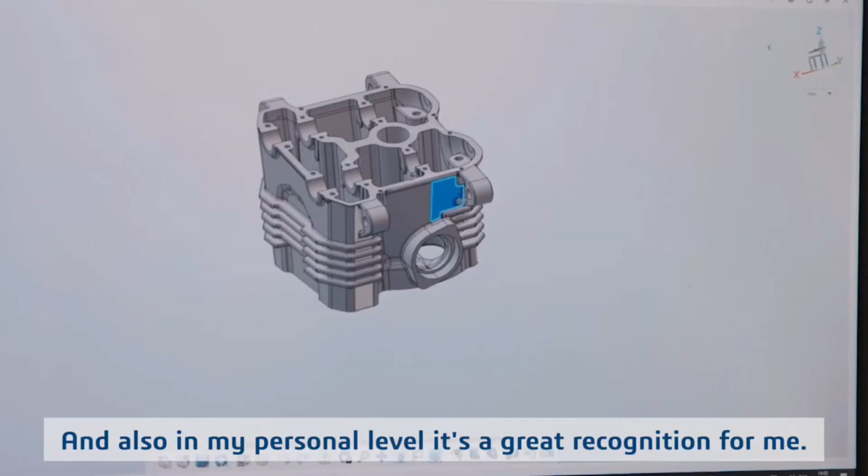The reason why I encourage every student to get certified is the opportunity that you get through certification. For instance, for me, I got involved in the international community, and also I got the opportunity to get outside my country, experience new stuff, working to implement all of the knowledge that I got through working on certification to make it into real life. And also on my personal level, it's kind of like a great recognition for me.

The certification, like CSWA specifically, it's really a familiarization with the software. It's understanding where to find the tools, how to troubleshoot, how to understand how you move within the software. So fairly easy to get trained up on that. The CSWP is more of a speed test, right? You have the same amount of time, but 50% more information.

I'm seeing more and more students coming into my class who already have certification, so we also offer the professional level exams for those students. The first time taking the test, I felt a little bit scared, but when I got it, it's kind of one opportunity for me. Taking the test, I was a little bit nervous to begin with, to be honest, because it was a pretty big deal. But once I got through it and saw my score, I was super excited and happy.

So the certification is one of the ways that I like to have an assessment for myself, whether I'm doing well or not. So when they see my LinkedIn profile, I got a certification, they didn't hesitate to reach out to me: man, we need your service for this stuff. So it's kind of an opportunity for me to do that. I would wholly recommend to get your certification in SolidWorks if you have the opportunity to. It would only help you in the future.

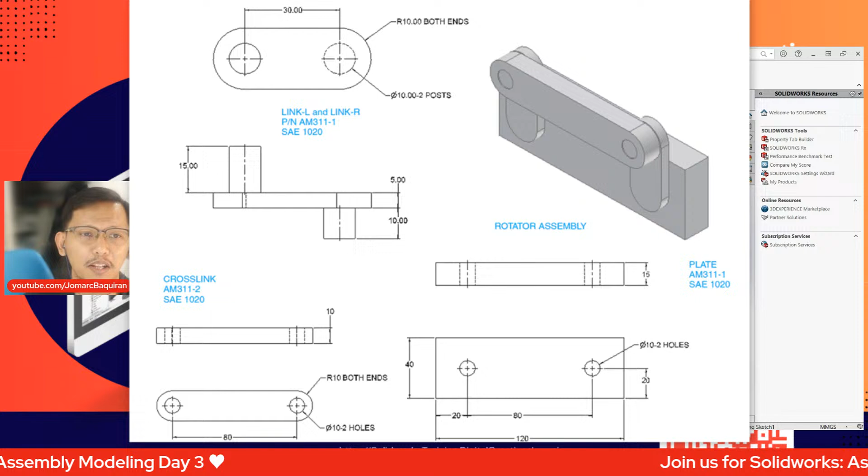So notice with this assembly, we have 4 parts. A very simple assembly, right? 4 parts, 4 components. Okay, again, requesting everyone to screen capture.

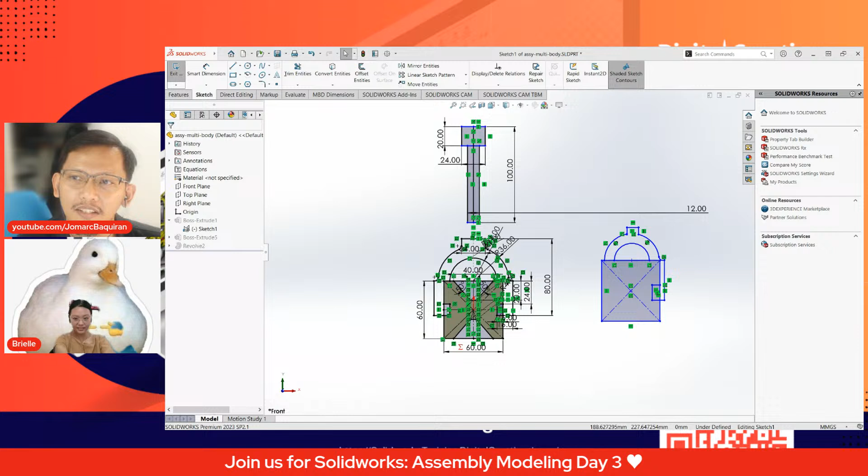And of course, again, joining together with me is Brielle. So I am currently trying to do my best to teach her SolidWorks as well, and ultimately to inspire this young lady to be in the STEM profession. Thank you for joining us, Brielle.

Okay, so again, we have 4 parts. Let's hit Control N. So, again, an assembly consists of parts. And parts, of course, consist of sketches, right? That's why we're iterating the importance of how to quickly draw, how to quickly create a sketch, and how to understand relations and how they are used in conjunction with parametric modeling. Okay, so we have 4 parts.

Let me ask our guest student, what do you prefer, Brielle? What do we create first? Okay. So again, going back to our challenge, notice here all the parts. If I'm going to ask you, who is the parent part here, right? So the parent part, where all the parts attach, is definitely the plate, right? So because of that, we will first be creating the plate component.

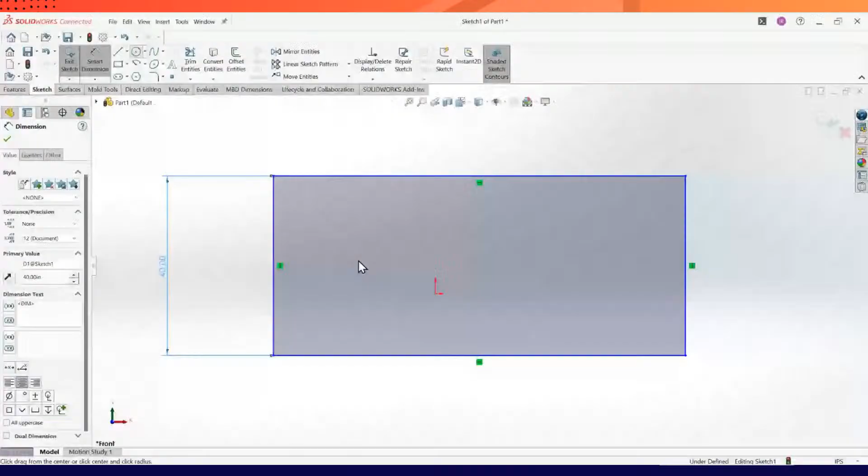So for me, again, we prefer that whatever we see on the isometric view should be the same position as well when we hit isometric view in SolidWorks. So if you're going to sketch the plate, definitely we'll be sketching on the front plane. And of course, notice the geometric center of this rectangle. So again, requesting everyone to make sure that the origin coincides with our geometric center.

So for Brielle, I would be suggesting she should have started with creating a center rectangle. Once more, requesting everyone to follow along. We're currently creating the first part. So for Brielle, currently she placed the origin at the lower left; I'm suggesting this origin should be at the geometric center, or at the center of our rectangle.

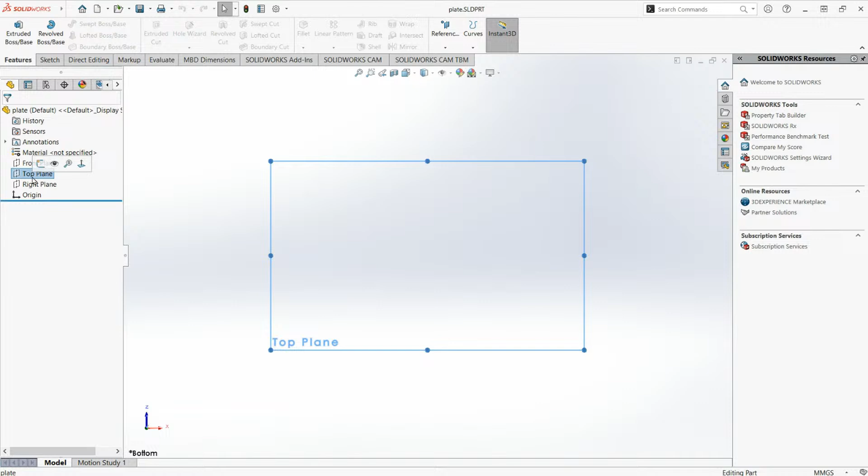So sharing my screen again. Let's sketch on the front plane. Selecting sketch. So again, there's a center rectangle command. Left click on our origin, grabbing smart dimension. Dimension for this to be 40. Selecting these two vertical lines, keying in 120.

Let's bring out the two circles. I prefer sketching them here. Creating a line from this center point to this center point. Making this line perfectly horizontal, again adding a horizontal relation. Turning this line into construction geometry. Selecting these two circles, making sure they're equal in diameter, so adding the equal relation. Grabbing our smart dimension. The diameter for these two holes is 10.

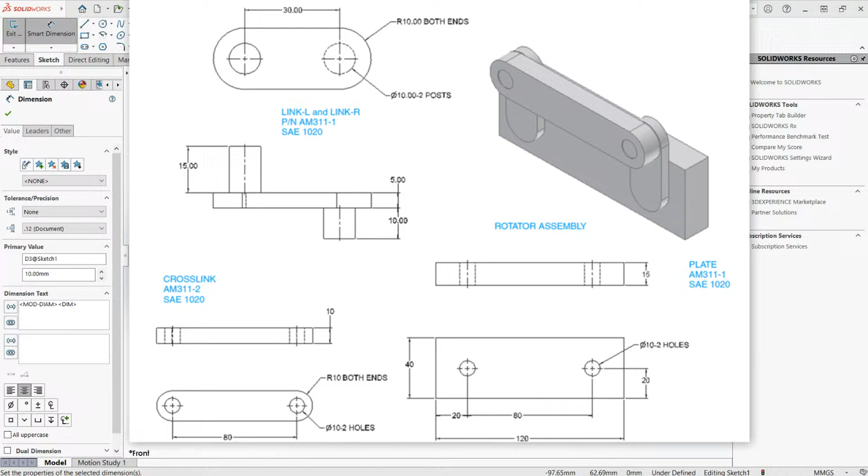So once more, showing you the activity. Yep, highly agree with Ivan. Thank you, Sir Ivan Vicencio, for joining us. Again, requesting everyone to follow along. So let's check Brielle's work. Sharing her screen.

I suggest Brielle try to move those blue circles. Hit escape. Okay. So from that movement, I am seeing she needs to add a horizontal relation. So I suggest for you, Brielle, select the center point of those two circles and then selecting the center point of... okay, it's now fully defined. So Brielle may now extrude this. Let me catch up, sharing my screen.

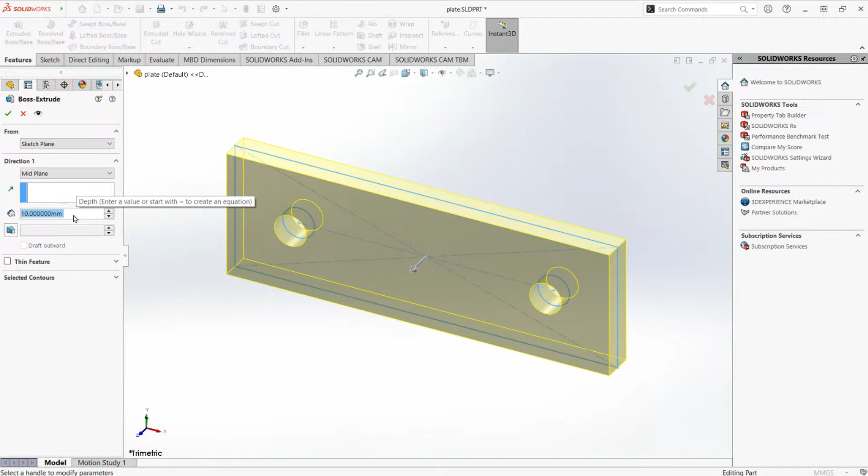So the center to center distance is 80. And for me, I'm going to select this construction line and our origin and add the midpoint relation. So we have a difference in approach, me and Brielle. Exiting out of the sketch, selecting extruded boss base, again making things at the center. For direction, I'm going to change this to mid plane and the thickness to be 10. So we're now done with our first part.

Again, sharing the challenge. Brielle, what do you prefer we do next? The link or the cross link? Okay, so she mentioned cross link. So let's go back. Control N, creating another part. Double left click this icon. Hitting Control S to save this right away and naming this cross link.

So again, showing you the drawing. It has a center to center distance of 80, diameter of those holes to be 10, thickness of the cross link to be 10, radius of that arc is also 10. So for Brielle, again, you should create a new part, Control N. Delete sketch 2. Suggesting you go back as well to that previous part and delete that sketch. Okay. It's now okay.

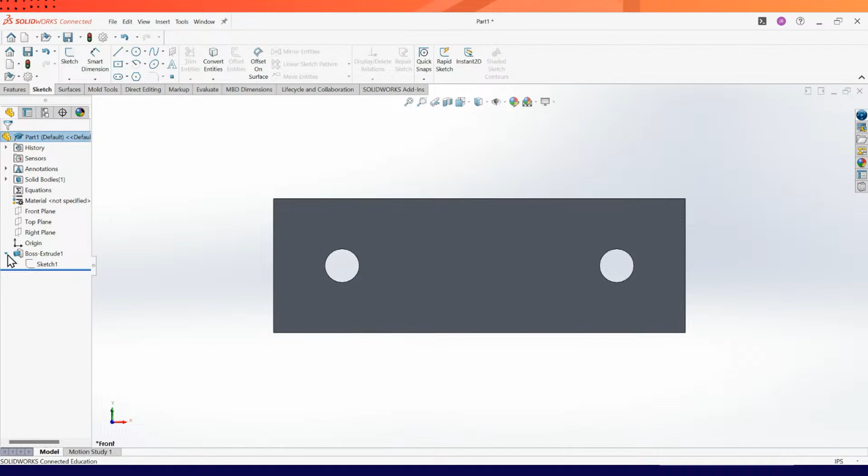So sharing my screen, let's create that cross link, hitting L for line and sketching on the front plane. Let's utilize the line tool, which creates an arc as well. So left click, and going back to that endpoint. Notice it turns into an orange dot. Going back, pulling out, and notice it now becomes an arc. So left click, going back, it's now an arc, and left click on this endpoint.

Let's create the circle once more. When we hold our right mouse button, notice we have the circle command tool. So notice if I move to the right, we're activating the circle command. So creating circles here, hitting S and selecting smart dimension. This one to be 10.

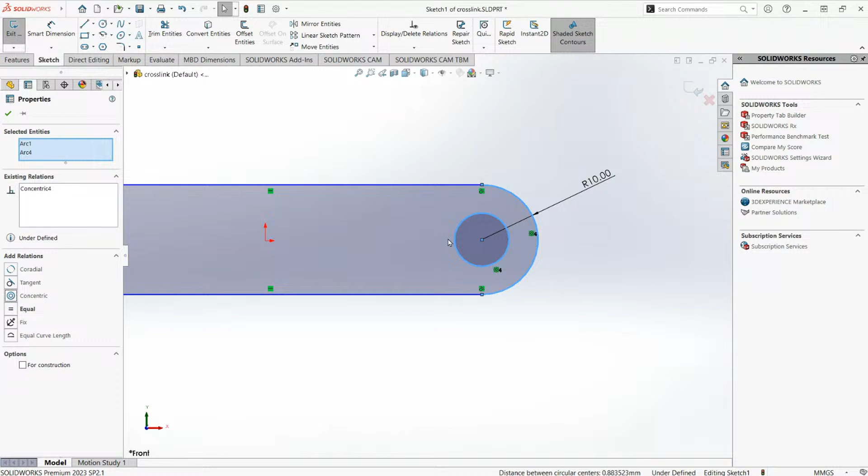And notice as well here, this circle and this arc need to have a concentric relation. These two, this arc and circle as well, selecting concentric. Hitting S for smart dimension, selecting the center point and the center point. Keying in 80. And resizing this circle. Notice by resizing this, it's obvious that this circle and this circle need to have an equal relation.

So next, let's align my design intent. Instead of creating a horizontal line, let me align the midpoint. When I hover over here, there's an indication: this orange dot indicates that this is a midpoint. So selecting this midpoint, holding control, selecting our origin, aligning this midpoint and our origin vertically. Same with our center point and our origin, aligning them both horizontally. So notice again, this time I forgot.

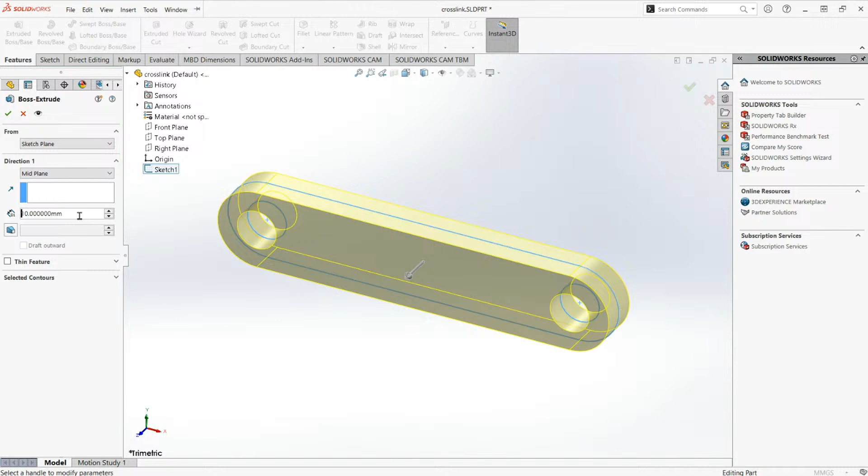Exiting out of our sketch. Selecting extruded boss base. Twirling this down, selecting sketch. And for direction, selecting mid-plane. And again, the thickness for our crosslink to be 10. So making sure it's 10 and hitting enter.

So next, our next target part would be the link. Notice the link L and link R have a cylindrical protrusion which has a distance of 15 and 10. So same procedure as our crosslink; the difference is it has a protrusion. So let's see Brielle's screen.

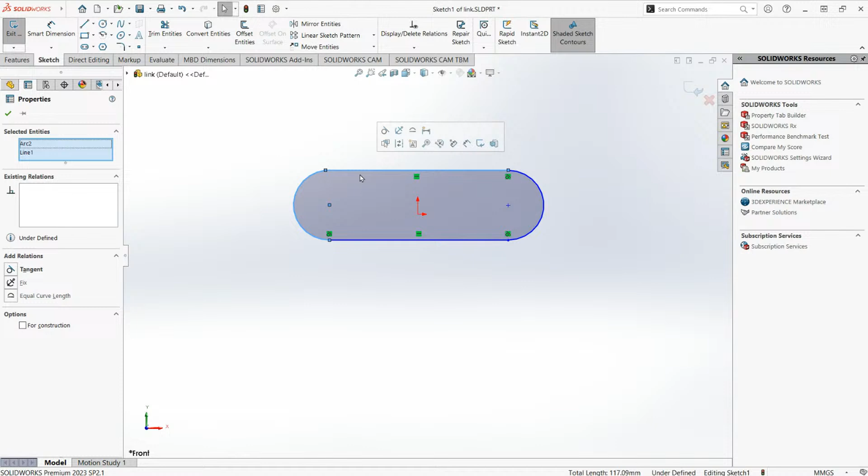So it's my turn. So again, for my sketch, this is my screen. So this one, notice, obviously this needs a tangent relation. Same with this arc and line, tangent relation. Let's now add dimensions, selecting smart dimension, radius for this, 10 as well.

Let's create 2 circles. So I prefer creating all of the sketch. It's also possible that you initially just create the slot, extrude, and then create another sketch for these 2 circles. Diameter for this circle is 10.

So making these 2 circles have an equal diameter, selecting equal relation. Again, aligning this midpoint and our origin vertically, the center point and our origin horizontally. Hitting S, selecting smart dimension, selecting these 2 centers, center point, value to be 30. And exiting out. Oh, now it's all black, which means this is fully defined.

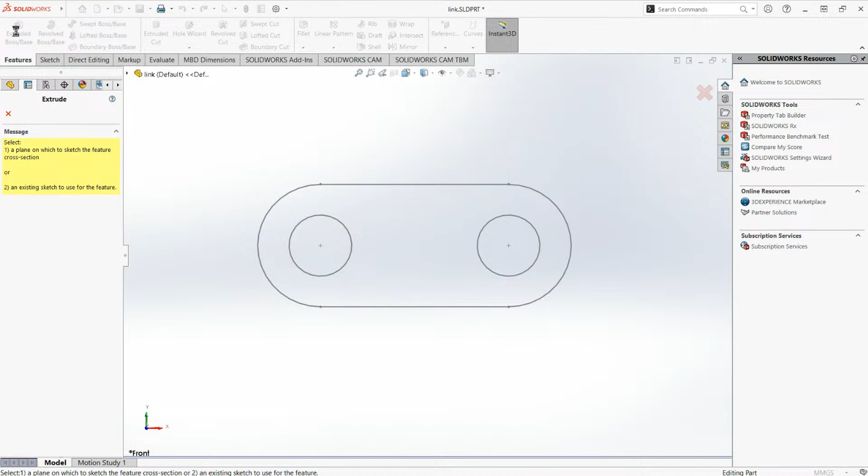Let's exit out of this sketch, selecting extruded boss base, selecting the sketch, which is sketch 1, and selecting this drop down. Notice contours is currently sketch 1. I'm going to add this contour. There's 3 contours. Deleting sketch 1. And again, for direction, making sure things are at the middle or center. Selecting mid plane. Thickness to be 5.

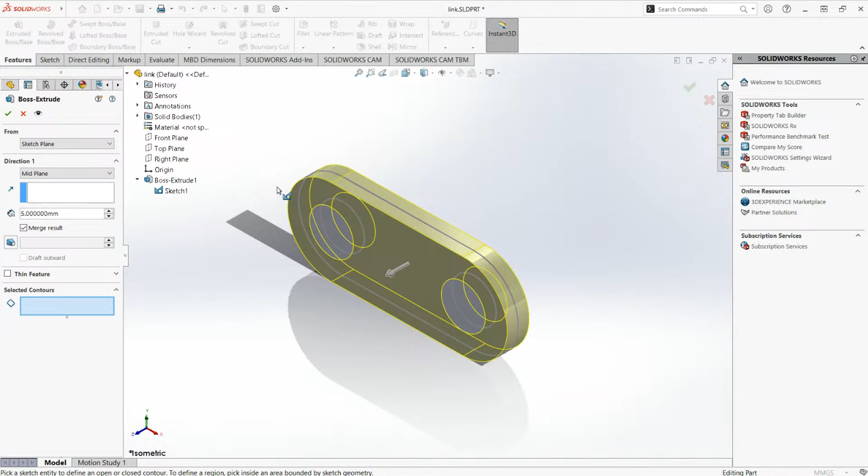Okay. And next, we're going to reuse that previous sketch which was consumed by the boss extrude 1. So I can make that sketch visible, selecting extruded boss base, twirling this down, selecting sketch. So for the contour, selecting this drop down, going to clear the selection. So selecting that region, pulling this out.

So for the direction, changing this to blind, pulling this to the other direction, and let's check our drawing. So again, we're extruding from the center or from the front plane. So we have to compensate. Going to type in 2.5, half of the thickness, plus 15.

Hitting enter. So I have just showed you that we can, of course, do MDAS, mathematical operations, inside that dialog box, and selecting the green check mark. Making sure, of course, this is boss extrude, not cut extrusion. Okay, Brielle is already done. Sharing Brielle's screen.

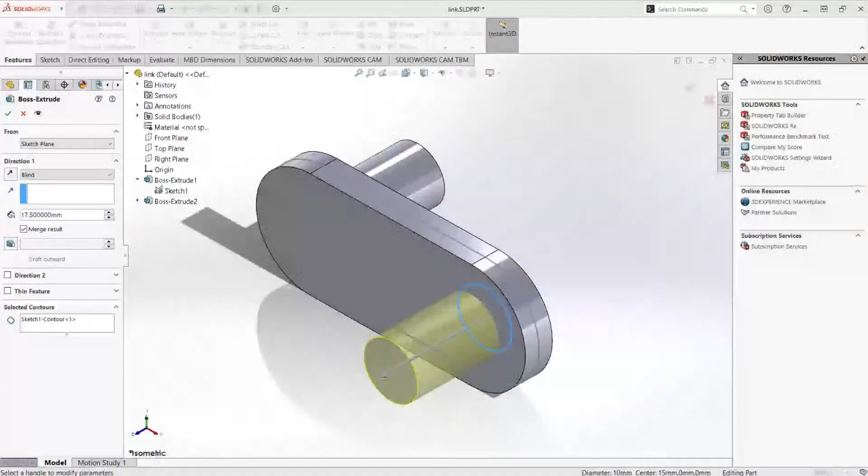So sharing my screen, again coming from this mid plane, this plane. So again compensating 2.5 plus 10, or in other words 12.5. Making sure merge result is enabled. Control 7 for isometric view, and we can now turn off the visibility of the sketch. So selecting hide.

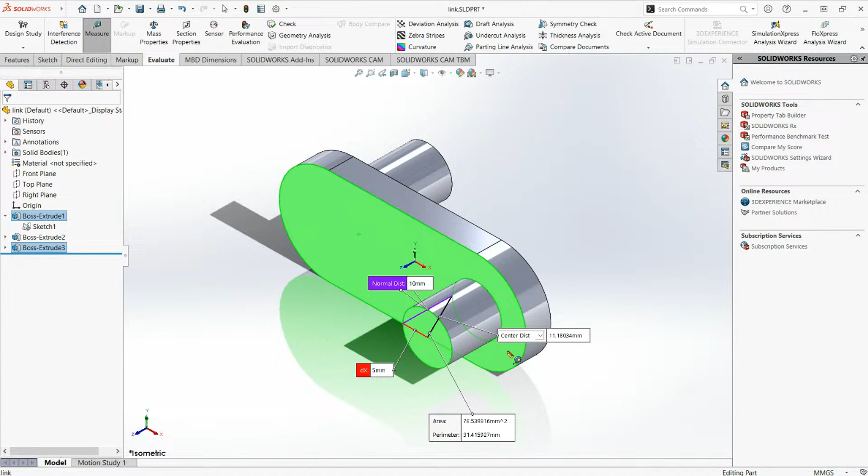So to check as well, you may head over to our ribbon, specifically the Evaluate tab, selecting Measure, selecting this face and this cylinder's face. So again, confirm this has a 10. The distance for the cylinder, or the height, is 10 millimeters.

So we now have all of the parts complete. I want you to hit Alt. So when we hit Alt, on the upper left, we have a window suggesting we tile this horizontally or vertically. So these are currently the parts that are opened. Got it?

So next, let's now merge these parts or create an assembly. So Brielle, everyone, I want you to hit Control N. This time selecting assembly. And again, I'm going to hit Alt on my keyboard to conjure the window, selecting tile horizontally.

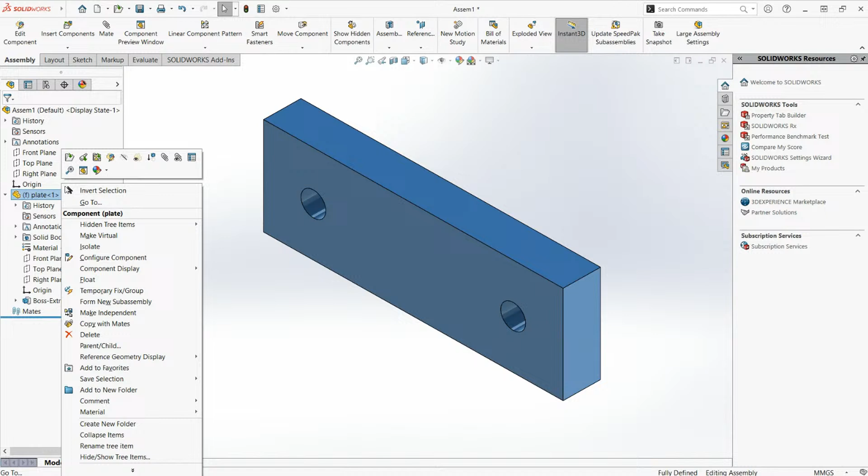So for my assembly, notice when I select origin, the origin of our assembly and the origin of our plate are not coincident. So with that, while this is currently fixed, let me share the challenge for everyone to follow along.

Okay, so going back again, notice that our assembly's origin and the origin of my plate are currently not coincident. So selecting both of these origins, next selecting mate, and making sure align axis is selected. So now the XYZ of our assembly and our plate are coinciding with each other. And making this part, of course, fixed.

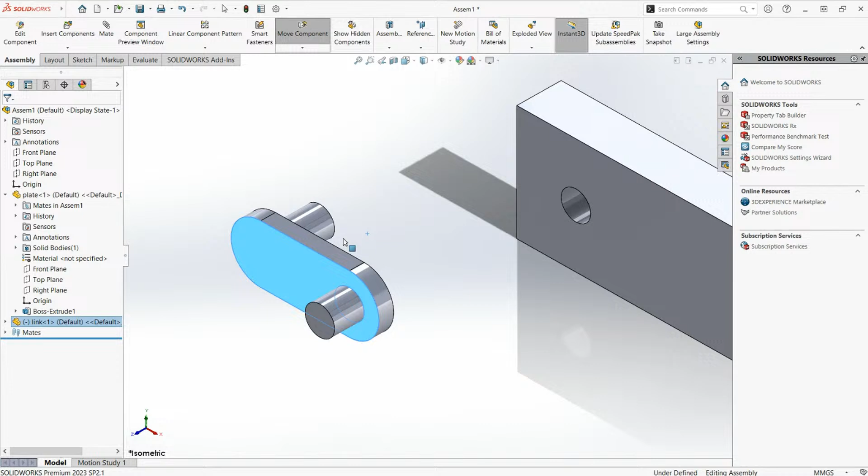Okay, let's help out Brielle, sharing Brielle's screen. So Brielle already placed all of the parts. For Brielle, I suggest let's focus first. Let me share my screen. Let's focus first on this first part. So selecting mate. The intent is to have this cylinder inserted here in this hole, right? So selecting mate.

My next intent is to select this face and this circular edge. So notice I have selected those edges. So again, let me repeat. Notice as well, on your left pane, you can see the mates added. Currently I have the coincident and concentric mates. So again, let me delete. Yes to all. I want you to redo what I did. Same with Brielle, let's wait for Brielle. Again, showing you the drawing.

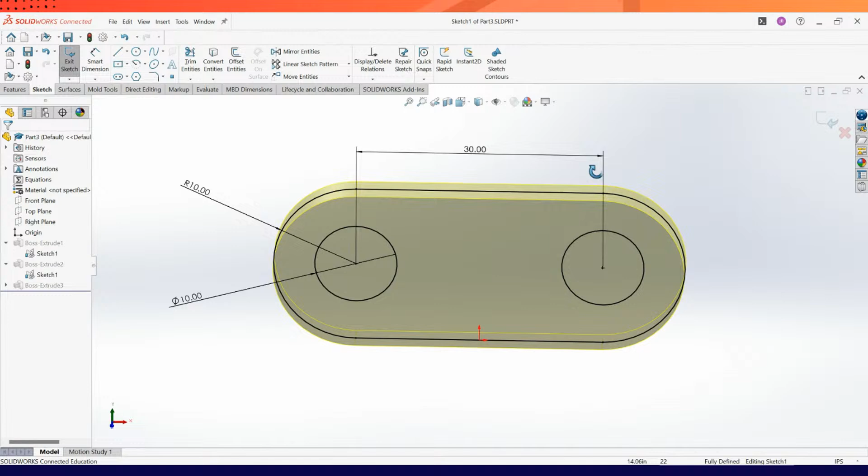Okay, so showing Brielle's work. For Brielle, the distance should be 10 and 15, right? If that happens, we need to do a revision. So Brielle, I want you to head back to that part. It's probably this. Is it Boss Extrude 2? Okay, select Boss Extrude 2, select Edit Feature. Hover over that, right click. Okay, and add 2.5. 2.5 plus 15. Plus, not X. Okay, 15. Notice, when we go back to the assembly, it will update. So hit the green check mark, Brielle.

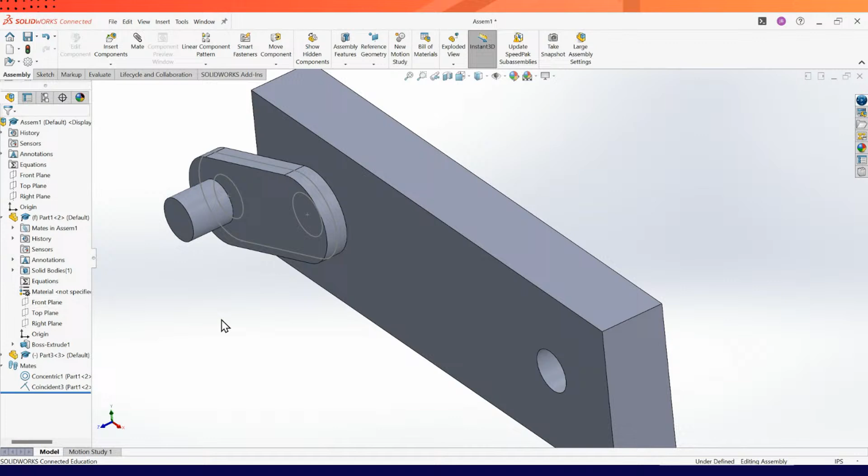Okay, select measure. Select this face and the top of that cylinder. Oh, so it's now 15, right? Okay, I want you to edit Boss Extrude 3. Exit out, select Boss Extrude 3. Okay, and add that 2.5. Yep, and 10. Okay, and go back to your assembly. Control Tab. Escape. Notice, it was having an interference, and now it is updated. So same procedure, Brielle, I want you to place the other link into the other hole. Yep, you may also bring that in.

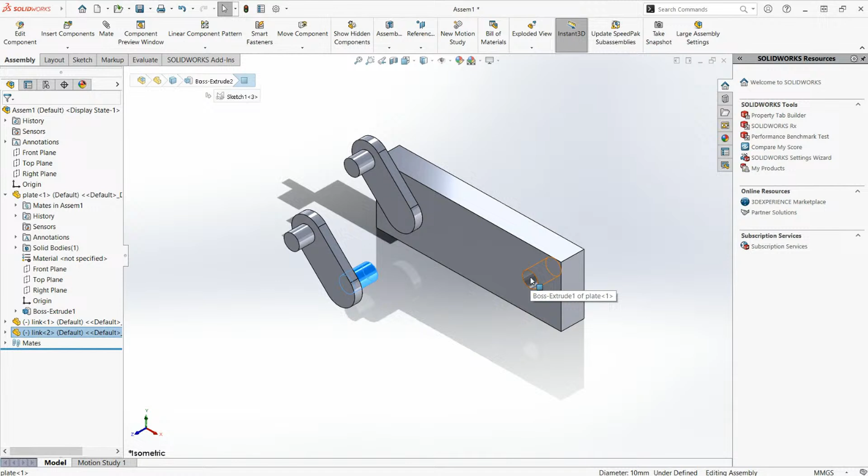So again, showing you the challenge. Let me catch up. Showing you my screen. Another way again, insert component, let's bring in link once more. Or another way to bring in link: I'm going to select link on my browser, hold control and move to our canvas. So I now have that copy of link. That's another method. Repeating the procedure, selecting this face and this cylindrical face, applying concentric. Next, selecting this face and this edge, selecting coincident.

And finally, let me show you the previous method of bringing in components: pressing Alt, selecting Window, tile horizontally, and let's grab cross-link. Notice my cursor is hovering over this icon; left click and hold, and move to where our assembly window is, and release. Let's maximize this window. Let's check Brielle's work. Brielle, same procedure, sharing Brielle's screen.

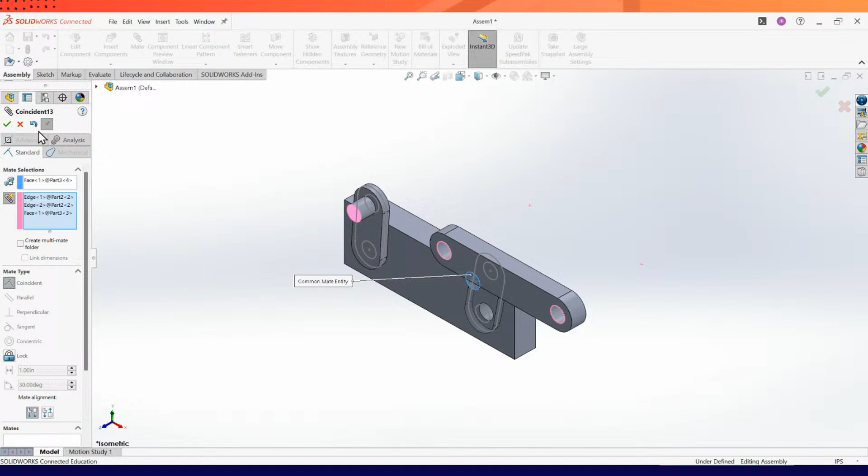Okay, so I have gone ahead and added the cross link again. Selecting mate, I can select this edge and this cylinder's edge and hit the green check mark. So feel free to experiment, and again, practice.

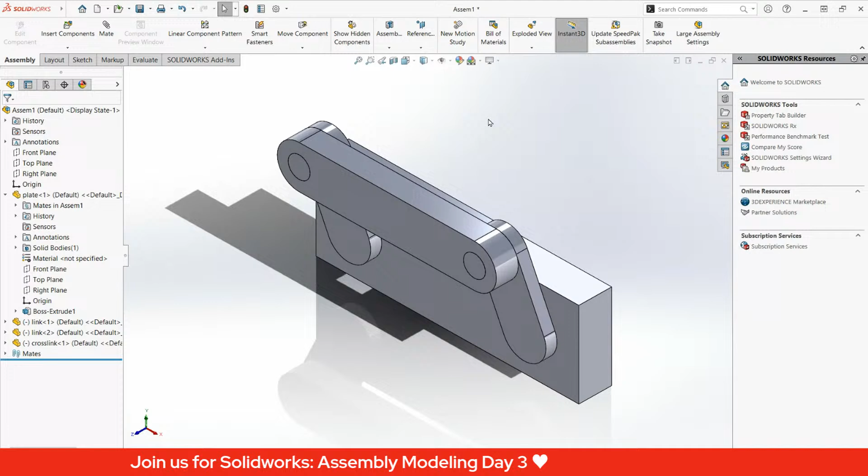Okay, so hoping you have completed the assembly. Just to inform everyone, this is already predefined, right? We already know the dimensions and details of those parts. And of course, there are always instances where we start with the sketch. That's why I gave an assignment for everyone to create this in a single sketch. So let's now discover how to create this, challenging everyone once more to create this in a single sketch.

Okay, Brielle, follow along. Control N. This will be somewhat difficult for Brielle. Let's now hit Control N. Requesting everyone to screen capture. So my turn, Control N, selecting part. Okay, let's sketch on the front plane.

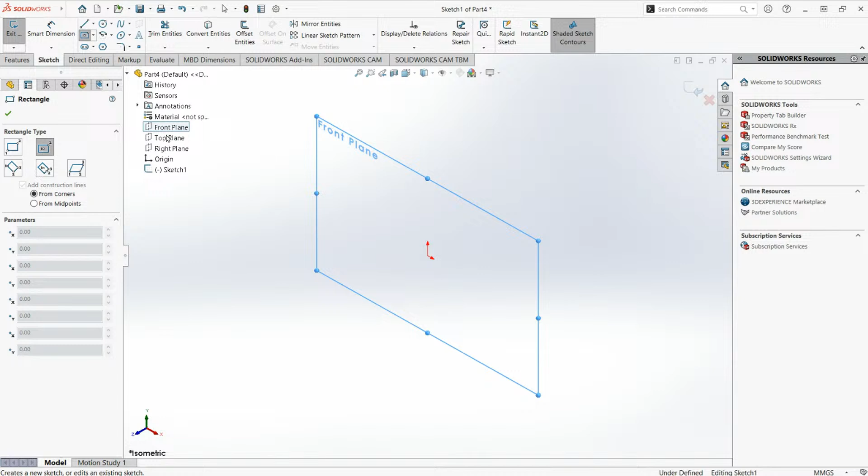So let's start out with a center rectangle, targeting to sketch on the front plane. Control 8 for view normal to.

Let's now add the dimensions, 60. Or I can have these two lines equal in length, but let's follow what the drawing is. So with this highlighted, I'm going to select this dimension, making them both equal to.

And I prefer creating the detail here for this cut extrusion. Let's add the dimension, which is 50. This one to be 50 as well. So resizing to check.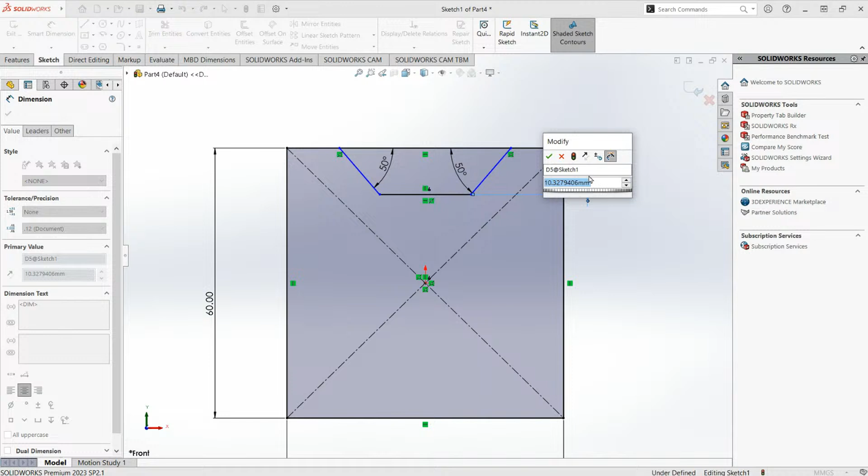Next, let's add the dimension here, which is 20. And the dimension for these 2 points to be 40.

So instead of recreating this below, my next intent is to simply create the cut extrusion on this right side, because what I intend to do later is to mirror them out. So again, that's why make it a habit to always position things at the center or middle, for you to be given the opportunity to save time by mirroring.

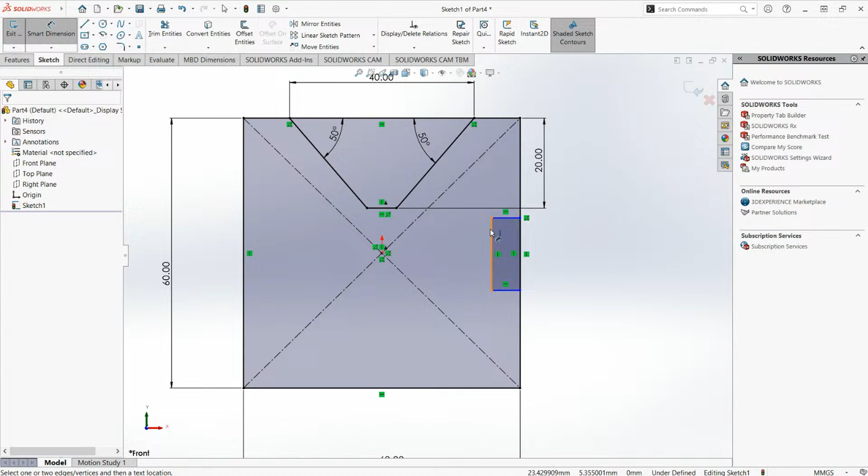So what's the dimension? This to be 6, and this to be 24.

So again, I'm going to be selecting the midpoint of this line and our origin, aligning them horizontally, and now creating a mirror line from this midpoint all the way here, making sure this is a construction geometry. So repeat, line again from this endpoint, from that midpoint to this midpoint, turning this into a construction geometry.

Next, let's select mirror entities up above. Mirror entities. And for entities to mirror, I'm going to be selecting this line, this line, this diagonal line, activating mirror about, and that mirror about will be this horizontal construction geometry line. So hitting enter.

Let's repeat. Mirror entities, selecting this line, this line, this line, activating mirror about, selecting this vertical line, selecting the green check mark.

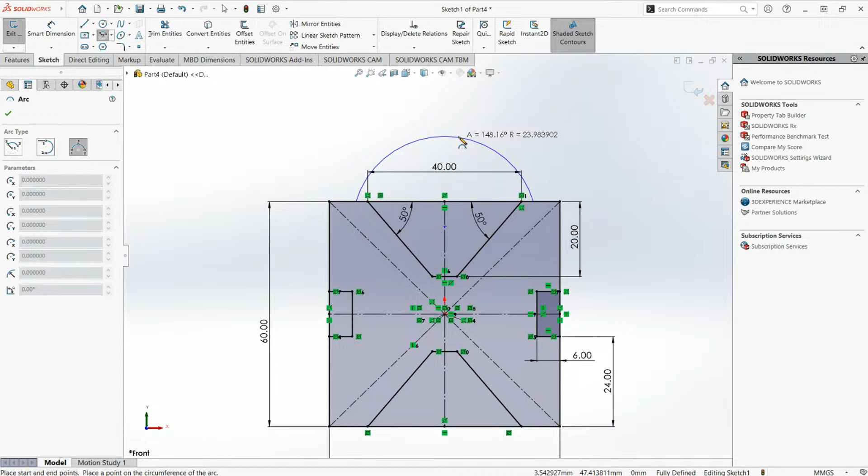So also I notice based on our drawing, the center point of this arc is coincident with the midpoint of this line. But first, let's add a dimension, this to be 24. Selecting this point, the center point of this arc, and this midpoint, let's have them coincident.

Next, I prefer offsetting this arc, so any value will do. And I'm going to delete that created dimension. Same with this relation, again this relation, hitting delete. Let's resize this.

Again, I am resizing the arc I have currently created. Next, I'm going to create a rectangle from this point to this point.

Next, my next intent is to trim this out. Selecting trim entities, holding my left mouse button to paint, zooming in.

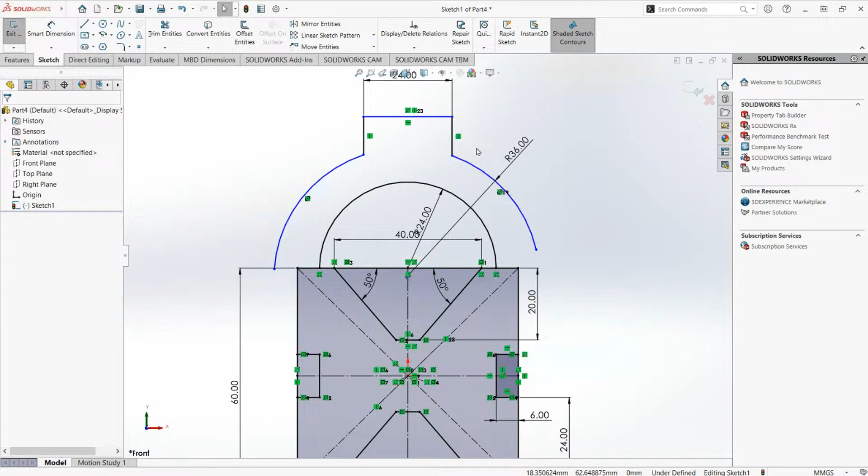So I'm planning again once more to create, to utilize the mirror command. So let me now focus creating an arc on this area, making sure these two arcs are both tangent.

Diameter, or the radius for this, is 4. Next, I'm going to create lines from here, moving up, and of course making this line vertical.

Let's add dimensions. S, selecting Smart Dimensions, selecting this horizontal line and this horizontal line. On the drawing, it says 80. And this vertical line to be 16.

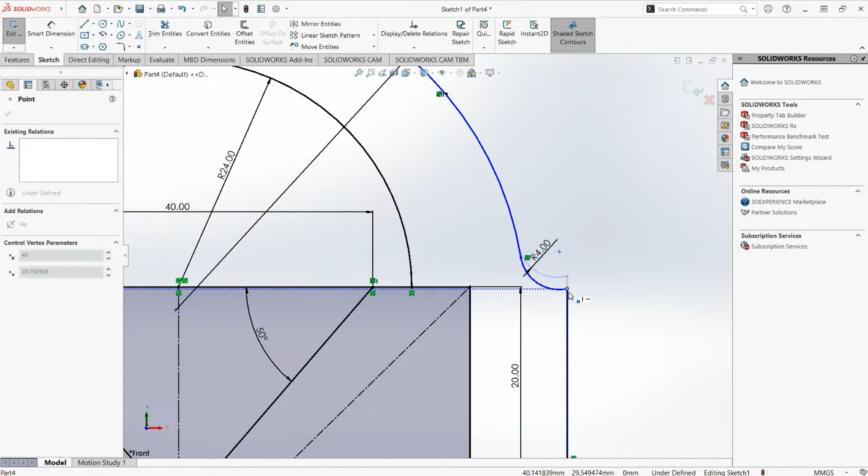So I am kind of seeing, what if I align this point and this point horizontally? Let's check.

I am also seeing that possibly the center point of this arc should also be coincident with the center point, or concentric. So let's check. Selecting these two arcs, making them concentric. So it turned into black, which is correct. We're doing the right thing.

Next, let's add fillets. Although actually, I'm seeing these fillets were later added when this is a 3D model. So, but for this learning purpose, let's add the fillet right away. But definitely next time, fillets are added later as you finish the model. It is later being added, it's not something that is added right away. Of course, it depends on the design intent.

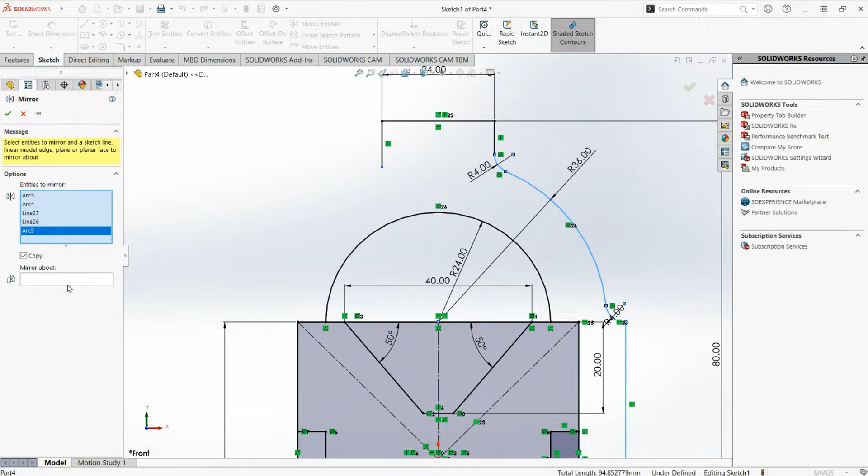Okay, so let me delete this arc. Selecting mirror entities, selecting this arc, this line, and this arc. Activating mirror about, so left clicking here, selecting this vertical line, and hitting the green check mark. So we have a piece protruding.

Let's trim this out by selecting trim entities or hitting S, left click and hold, making sure it's power trim, hitting the green check mark.

For that shaft, instead of creating it right away somewhere here, the request would be creating this above. So creating a rectangle here, another rectangle, making this midpoint, selecting this midpoint and the midpoint of this line.

Let's align them both vertically. Let's grab our smart dimension. This to be 20. This to be 100.

Okay, let's move to Brielle's work. Okay, Brielle, that's 80, right? It's 80. Yeah. You create now the shaft.

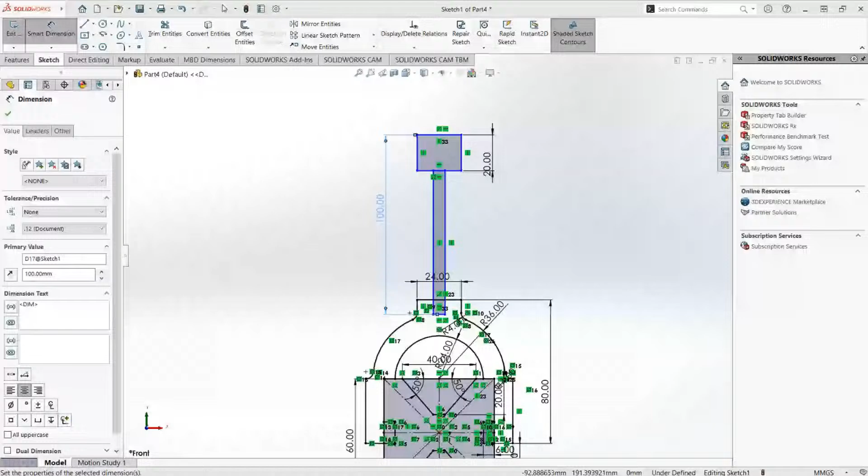Okay, again, sharing my screen. Let me grab this point and move this up. Selecting smart dimension. Diameter to be 24.

The diameter for this to be 12. Next, I want this to be aligned as well vertically, so any of the midpoints of these lines. Selecting, I prefer this midpoint, and our origin, aligning them vertically.

So looks nice. Let's wait for Brielle.

Happy New Year to Sir Carl Joseph Sebastian. Thank you, sir.

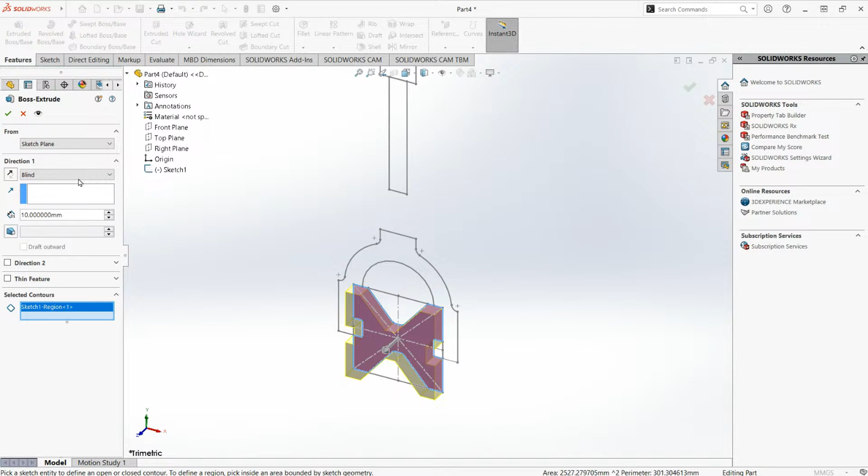So, direction, mid-plane, distance 100. Hitting enter or selecting the green check mark.

Again, sketch consumed, so it is actually still intact, just the visibility is turned off. Okay? And notice we have created one solid body.

So next, I'm going to turn off the visibility of this solid body, selecting hide.

Okay, so let's help out Brielle, sharing Brielle's screen. So for Brielle, I suggest you select any of those horizontal lines. Select a midpoint. And that midpoint, yep, zoom out.

Align it. Select the origin. Zoom out. Yeah, select this origin. Yeah. And align them. Select vertical. So is it aligned already vertically?

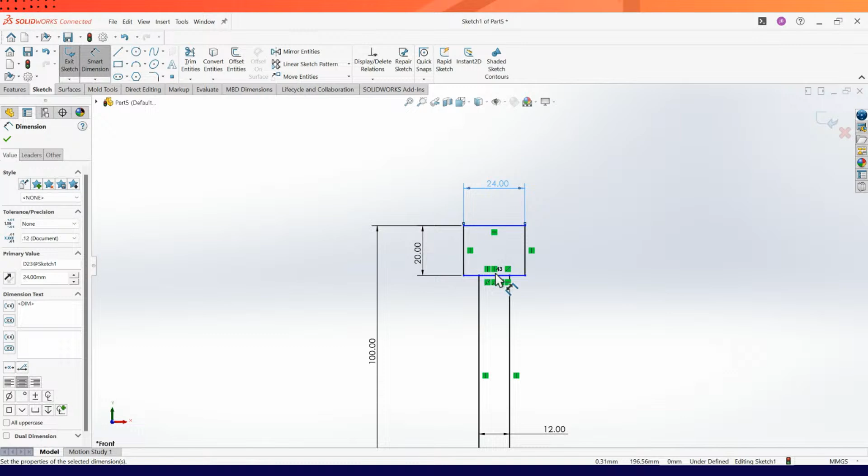So let me go back to sketch and demonstrate to Brielle. Brielle, I have selected this, the midpoint and the origin. Aligning them vertically because my next plan is to create a Boolean operation.

So also please check, Brielle, if the form is complete. So whenever I move, let me share my screen. So notice this is in its full form, right?

Done? So in this instance, it doesn't need to be fully defined.

Okay, so exiting out of the sketch once more. And recall, I have turned off the visibility of our solid body. And let me turn on the visibility or show the visibility of our sketch 1. So going to extruded boss base, twirling this.

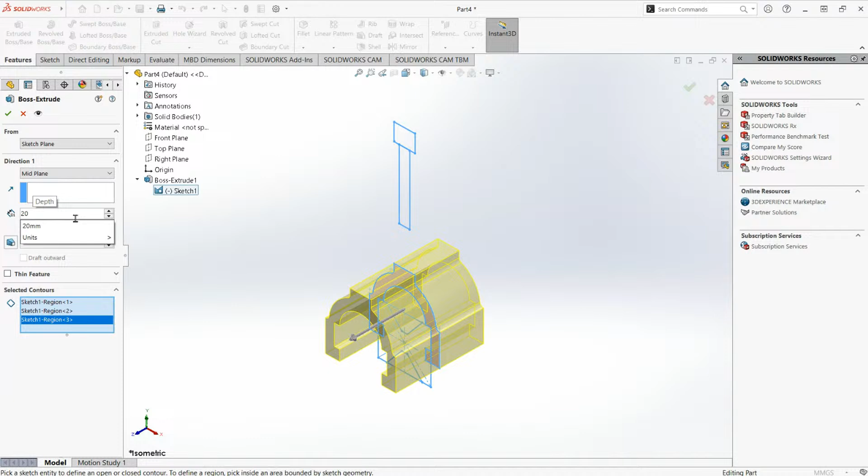Control 7. Again, direction to be mid-plane. Thickness to be 20. So notice we have created the second body, which is boss extrude 2.

We now have 2 bodies. Let me turn on the visibility of boss extrude 1. Okay, and finally, of course, this is not an extrusion.

So let's go back to sketch 1, edit sketch, and for the revolve command, definitely it requires an axis. So let's create a line that will serve as the axis. So exiting out of our sketch, selecting, let's look for revolve.

So again, when we hit S, it's sort of search, right? So S, R-E-V. So we can search commands. So selecting revolve boss base.

I really do prefer selecting the sketch itself. So for the axis of revolution, selecting this line. And for the contours, I activated contours. Notice it's currently highlighted in blue.

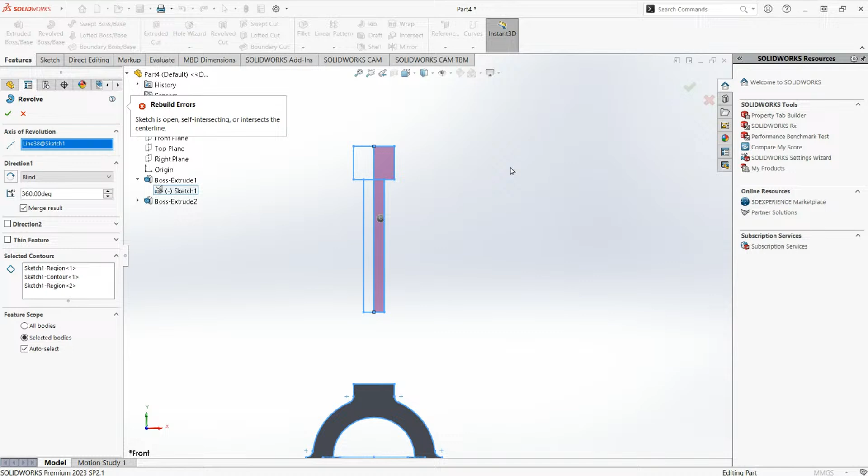Selecting this contour and this contour. Okay, so again, line axis of revolution, that symmetry line, that vertical line at the middle or center, selecting the green check mark. So checking Brielle's work.

Okay, so for Brielle, I think you forgot to add that detail. I want you to select Edit Feature, right-click Edit Feature, and add that contour. Yes, that's right, add that contour. Okay, select that, zoom in. Okay, green check mark.

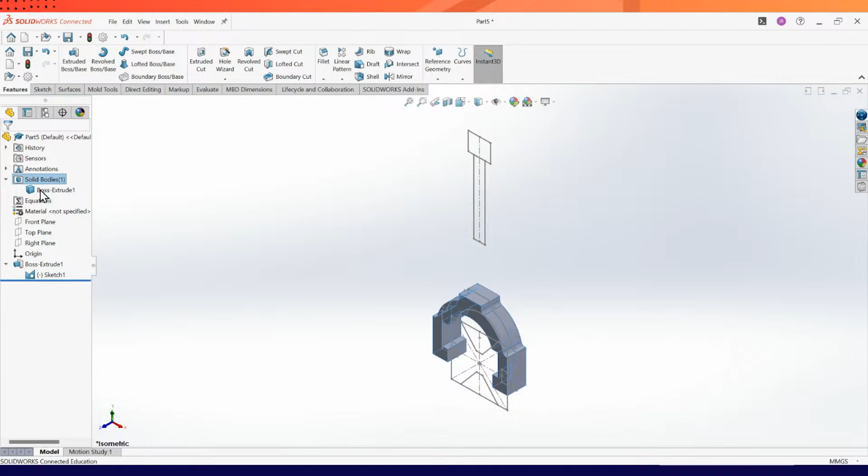And then I want you to turn off solid bodies. Twirl that - no, not the folder, just the part, the body. Yep, okay, now again, go back to extrusion.

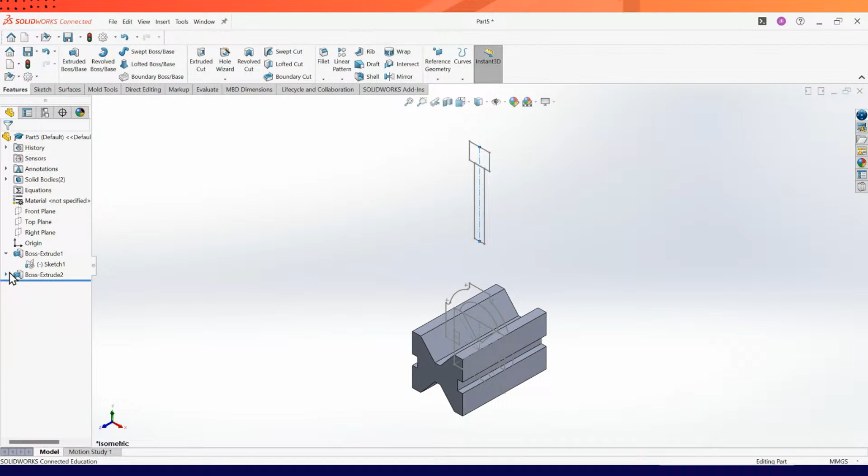So next, of course, Brielle, create the revolve part. Yep. Waiting for Brielle. I think the vertical line, your axis should be a solid line, not construction geometry. Yep, okay, are you done with the revolve? Revolve that.

So now, right now, sharing my screen. Let's help out Brielle.

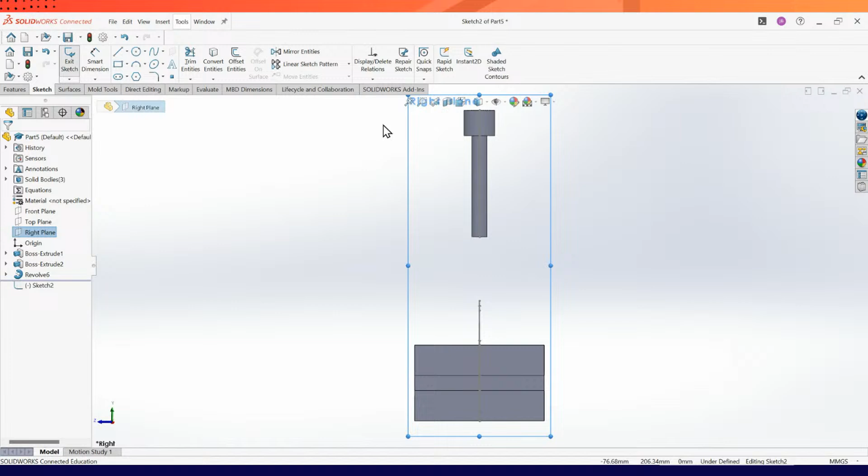Okay, so sharing, we're still looking at Brielle's screen. I want you to turn on, Brielle, turn on all the visibility of the bodies. Okay, exit now, out of the sketch. Later, Brielle, later, so that should be done later. Exit out. Okay, from here, turn on the visibility of the other body.

Okay, so with that, let's focus first on the base. Let's name this as the base. So I want you to select base. Yep, right click - not there. Under bodies, so head over to bodies. Bodies. There you go. Right click, and insert into new part.

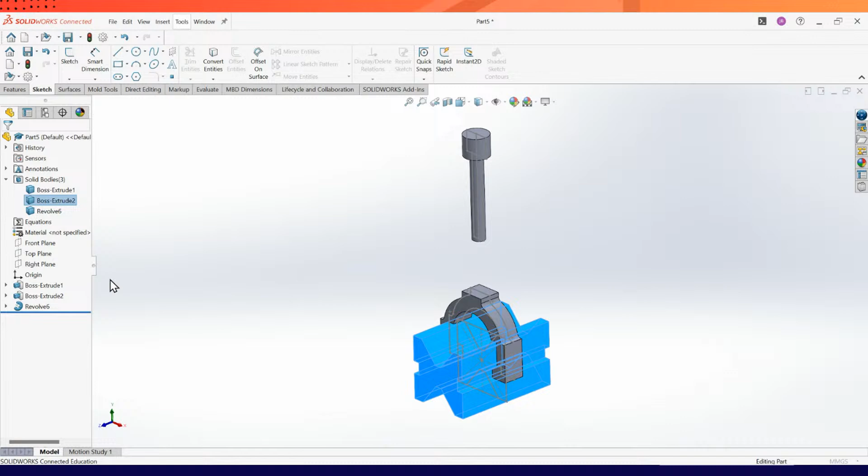So let me share my screen. So our next target is turning this into a part. So for our attack would be, I have selected boss extrude 1. I'm going to be selecting insert into new part, and I'm going to name this as base. I have created another folder naming this as base. Hitting the green check mark. Selecting yes. So notice we have created a new part coming from our multi-body part.

So I know that because under my folder, base is now created. So base created. Let me just hit Alt window, tile horizontally. Let me close the other parts. Closing this.

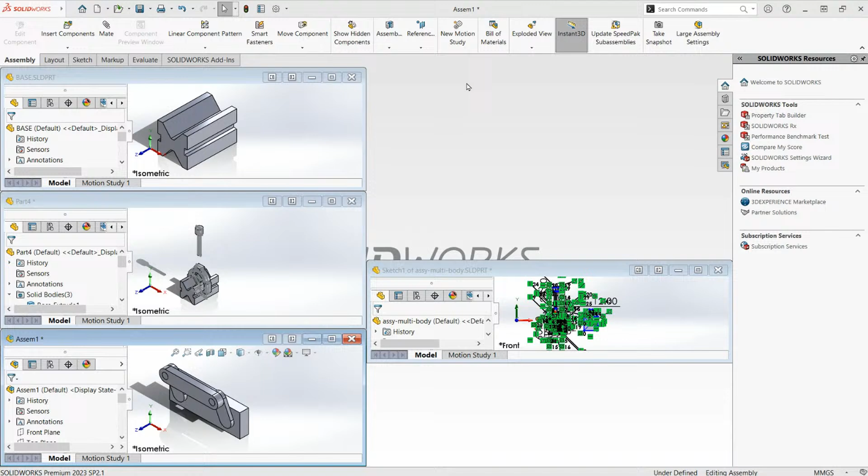So for Brielle, I want you to hit yes. Okay, so the name is currently boss extrude, but of course, guys, make it a habit to rename items.

So I'm going to close this too. So let's go back to our multi-body, the initial part that we have created. So this is what I have recreated. So let's go back to part 4.

Again, next, selecting boss extrude 2. Right click, insert into new part. So for its name, saving this as, let's say, slider. Selecting yes. So we now have slider as well.

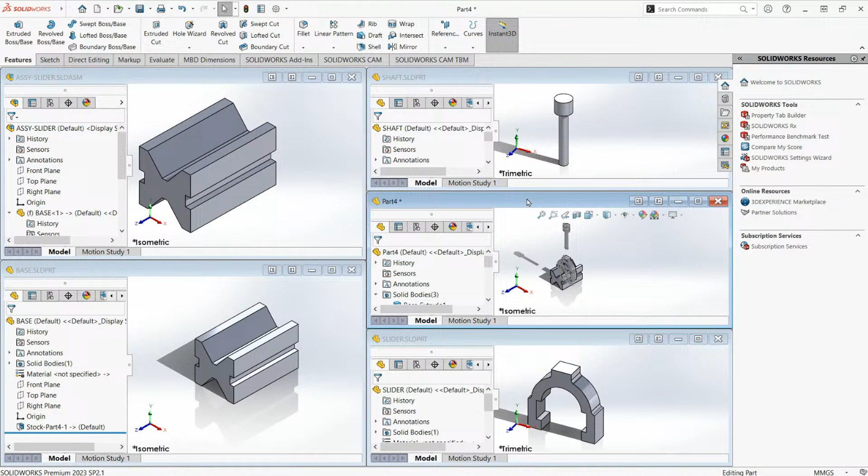I think I have saved it outside of my folder. So going back, let me arrange this. So this is actually named as part 4. I haven't saved this one. So hitting Control S, let me save this now as multi-body.

Okay, let's go back to our assembly. Maximizing this into view. Let's insert component. The next would be the slider. Okay, Brielle, I want you to bring in slider. Have you created the assembly? Control N, create the assembly.

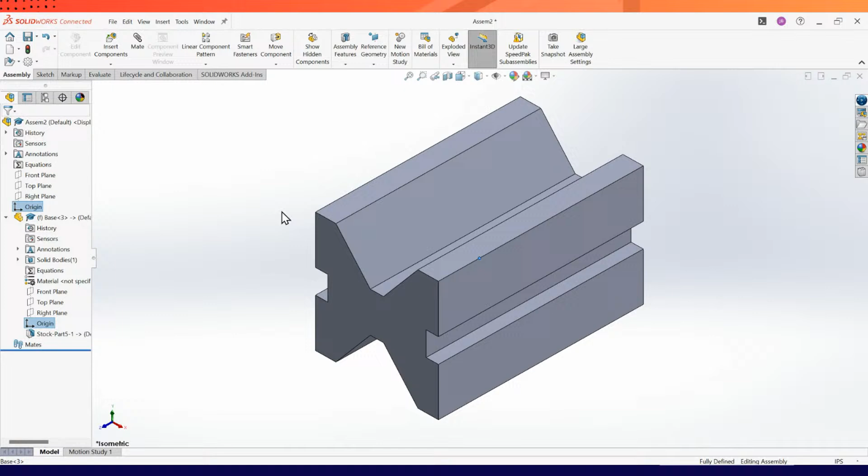Okay. Selecting yes. Insert components, double click base, and hit the green check mark right away. So notice it's already fixed and the origin of the two are already coincident. So next, you may insert another component. Brielle, insert the components. So sharing my screen, going back.

So next, let's have this sliding with the base. So probably I'm going to select this face, and this face. And another one would be, I'll probably be selecting this face and this face, hitting the green check mark. So let's check. Of course, there are also other ways we may align. So again, same with the concept of relations.

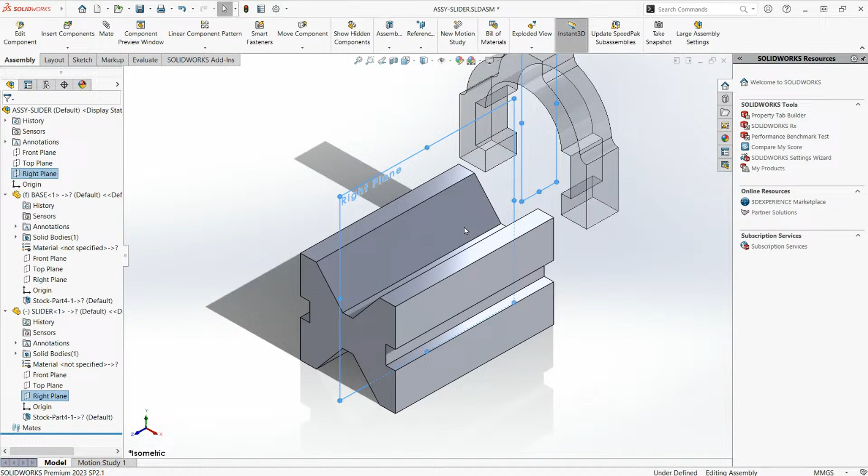I'm going to go to mates. I'm going to delete the mates that I have selected. Yes to all. So another way, because I know it is at the center, I'm going to select the right plane and the right plane of these two components to align them. Okay, so it is now aligned.

And next would probably be applying a mate. I prefer this face and this face. So it really depends on your approach. So we're having the same result. Okay, let's go back to Brielle. Oh, you now applied the mates.

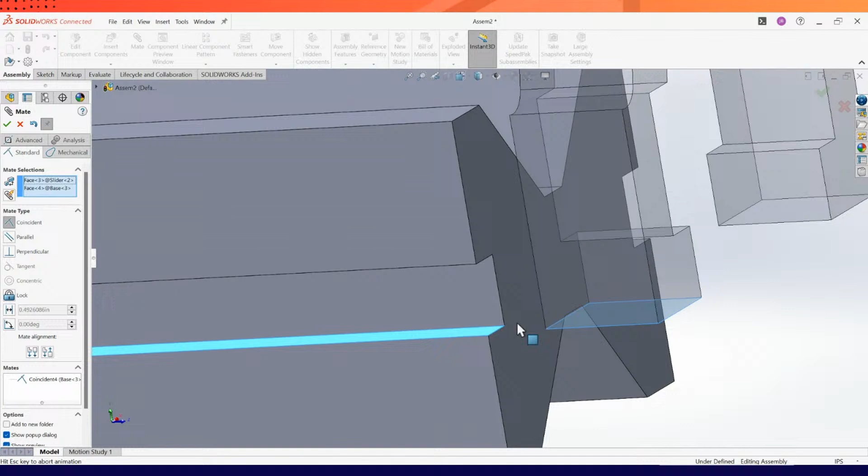Okay, so next, going back to my screen. So Brielle was asking, when are we going to create the holes? So from here, we can now finally create those holes. So for slider, Brielle, I want you to select slider on the browser tree. I want you to select edit part. So notice the words under the slider are all in blue color.

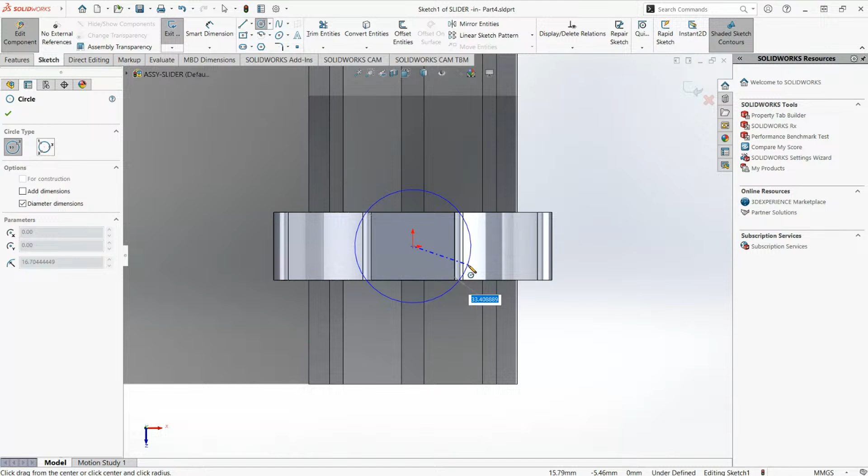I want you to select this top face, select sketch. So from here, let's now create that circle. And because we made it a habit to always be at the center, good thing, right? The origin for this part as well is in the center. Save and continue for Brielle. So what's the diameter? It's 12.

So let's now create the cut extrusion. Selecting extruded cut. And for the direction, let's select up to surface, up to this face. Selecting the green check mark. So we're done revising the slider. Exiting out of our in-place edit.

So next, I have brought in the shaft, selecting insert component, selecting shaft. So of course here, finally, I'm going to select this face and this face, selecting concentric. So previously we created an in-place edit. Just to make things more interesting, I prefer selecting shaft and opening this as an isolated part. So previously we selected edit part. So now let's discover open part.

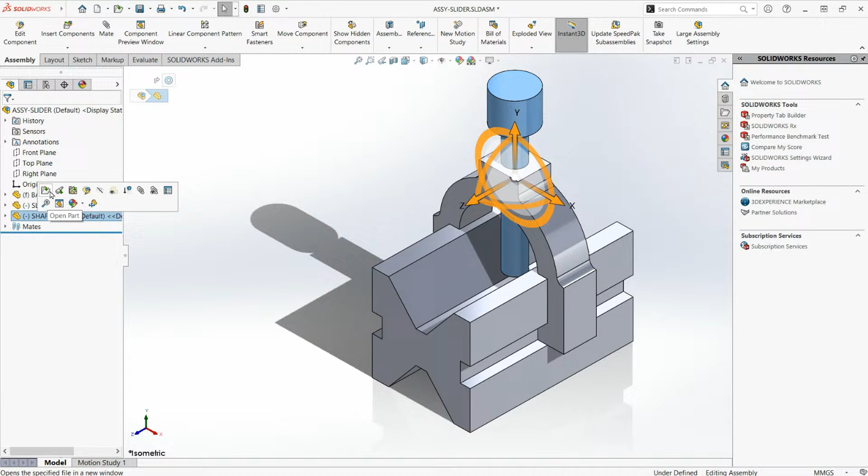So with open part, again, based on our drawing, I'm going to select the right plane, sketching on our right plane, creating a circle here, diameter to be 5. It is 5. So notice it needs to have a vertical constraint. So recall when we created this part as a multi-body, recall the distance of this sketch with our origin. So selecting the origin, aligning them vertically.

And there's another dimension coming from this edge to be 5 or 20. It's actually 10. Sorry. So again, creating a cut extrusion, selecting extruded cut. Direction 1, I prefer through all both. And hit the green check mark. Control 7 for isometric view. Control S for save.

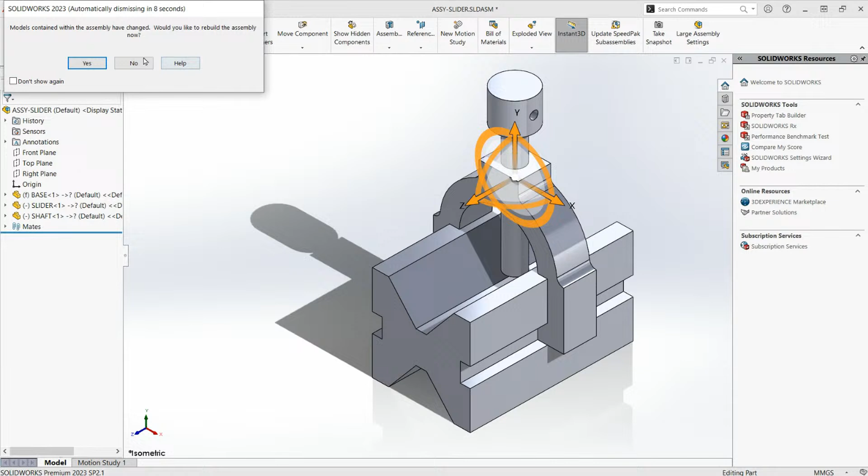So I hope this assembly training is enough for you to be inspired and to continue studying and preparing for CSWA.

But turning the hypothetical into the physical is a team sport. That's why we're consistently enhancing our software based on your direct feedback, infusing it with the latest technology, and increasing its capabilities to meet your specific needs. For more than 30 years, we've been evolving with you, making product development more accessible, scalable, sustainable, enjoyable, investing in the future, your future, with cloud technologies, real-time collaboration, artificial intelligence, and beyond. And we're just getting started.

SolidWorks is everywhere. Whoever you are, whatever you need, we've got it covered. You make the future. We help make it possible.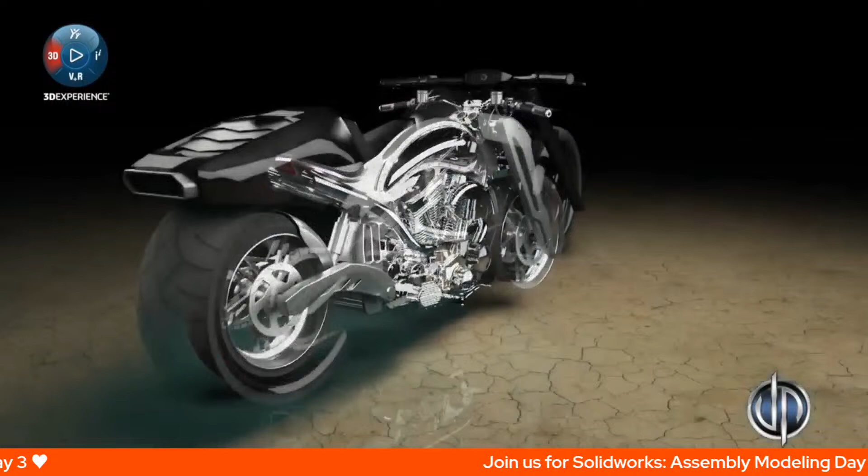Hey teachers and students, I'm Jason Poole and I'm an industrial designer. I've had a lot of fun throughout my entire career, from being able to design things like video games, motorcycles, automotive design, and even some furniture design. And you know what? One thing that has really helped make me successful is a tool that I use called SolidWorks. They now have brand new tools that are powered by the 3D Experience platform. That's a platform that's 100% cloud-based that enables you to design, create, and collaborate anywhere, anytime, and from any device.

You get 3D Designer, that includes 3D Creator, and my personal favorite, 3D Sculptor. The best thing about these X apps is that they work directly with SolidWorks, making your workflow that much more powerful. Reminder, these tools can easily work on any device. You might be like me, and whenever you start something new, it might be a little daunting or even a little scary, but have no fear. You are not alone when you start your journey on the 3D Experience platform. You have access to tons of great learning material and solutions. These will definitely help you get started with your learning process.

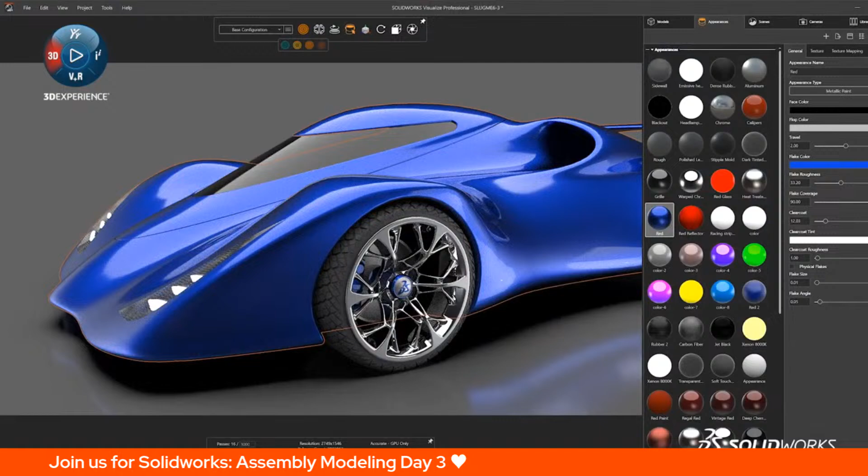You can totally use the communities to post your work, get inspired, or just interact with other students and even professionals that are using the same tools. By studying SolidWorks, I was able to fulfill my dreams of becoming a designer.

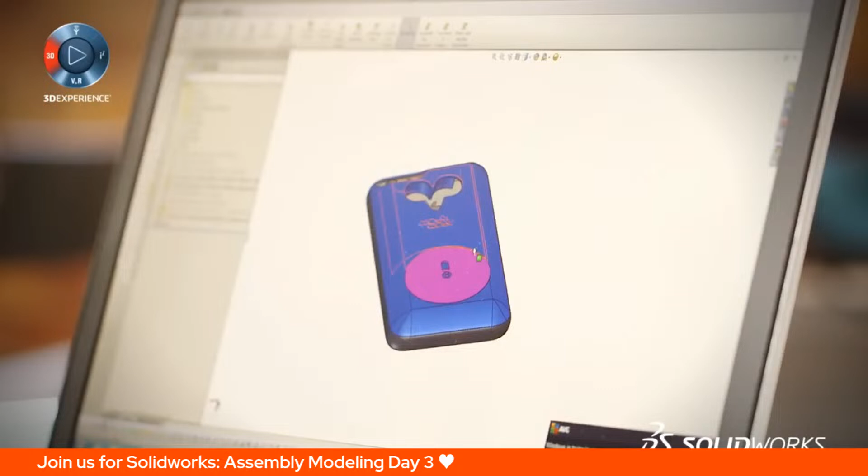I'm Josh Shires, and I went to Oxford Brookes University in Oxford, and I've just created my first product, Musicase by Mous. Mous was actually a kind of a personal issue that I had. I genuinely got fed up of losing my headphones on the half-an-hour bus trip to my university, and I thought, I'm studying engineering, why don't I do something about it? So I used the tools at hand, which happened to be SolidWorks, and started designing.

My name is James Roberts. I went to Loughborough University and I graduated in product design and technology. And at the moment I am a design innovationist, and I have been doing this whole thing on SolidWorks. In my final year of university, I came up and developed MOM, which is an inflatable incubator made for the developing world. And basically the main point of it is that instead of £30,000, which is normal cost of incubators,

mine costs about 250. Nearly all of the incubator benefited from SolidWorks and CAD, from the volume actually containing the incubator in the outer shells to actually having to make sure that this could withstand a plane ride to Syria and maybe being dropped out of a plane from a care package.

When I started using SolidWorks to create Mous, it brings things to life. You've got this thing in your head, this dream, and you start putting it onto a CAD program and creating a 3D model. You can really start to feel, oh wow, this could potentially be something. And also seeing the problems that emerge from it as well. So being able to revolve around the parts, the assemblies and section views, it all starts to be a great tool in problem solving. It feels great seeing your model in there. I think that's one of the first sort of adrenaline rushes.

Nowadays technology moves so fast, and the market that we're in moves incredibly fast. A company will bring out a new phone every 6 months, and you've got to be on the ball. So I think being able to iterate quickly and design quickly is one of the biggest advantages. SolidWorks really helped inspire me in that I knew from the outset that I could actually achieve this in a CAD program. I didn't have that whole, oh no, I've got to go into CAD now, it's going to be horrible. Instead, it was more of a joy to use.

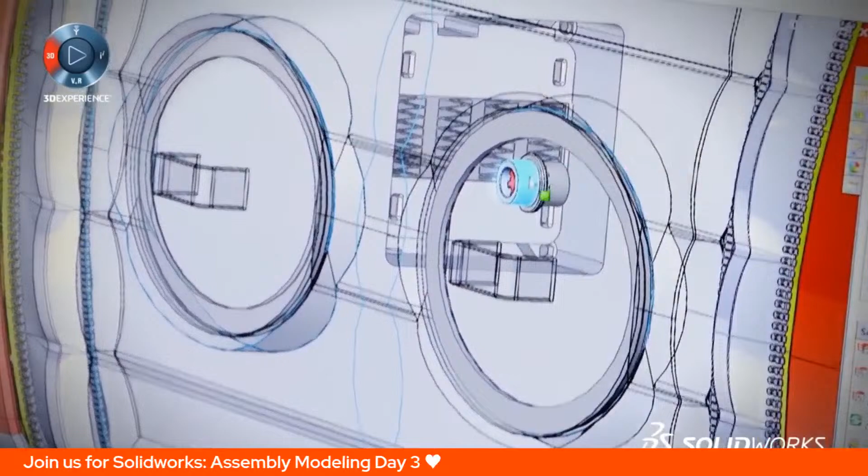There are two parts where I think SolidWorks really helped me. One of them was for all the attachments for the functional model, which is more of the 3D printing parts, and without those I couldn't have actually tested if it actually works as an incubator. The second was when I was making the shells to actually contain the inflatable body. I had to make sure that the volume inside was large enough to hold the inflatable piece, and SolidWorks could tell me instantly if that would work.

One of the biggest challenges we had is the fact that you're making a protective case and it needs to fit someone else's product very well, with a very tight tolerance, and also the phone tolerance varies by 0.2 of a millimetre. So you've got to make something that compensates for that. Being able to take your model into a drawing in SolidWorks very rapidly and create tolerances for your manufacturer is a great benefit.

SolidWorks helped validate one of our biggest problems after our first production batch, in that we were trying to create a snap feature, and it's kind of a bit of a guessing game in my experience of how the plastics are going to warp and snap together. So I did a bit of FEA on a snap-fit feature and discovered that the distortions and the displacements were far bigger than anticipated.

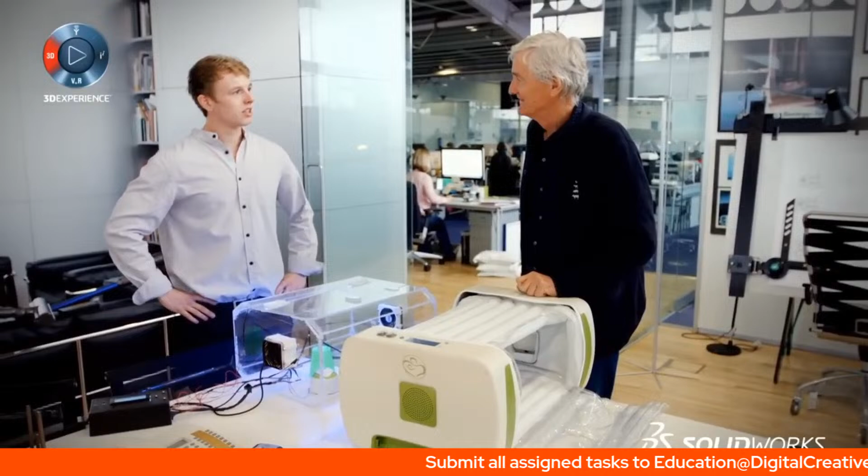Kind of an inspiring person to me, and showed him how it all works, took him throughout the whole thing, and then he surprised me, just stuck his hand out and said, well done James, you've won, and it just blew me away. Congratulations. And having someone like James Dyson say this product could actually do something great is a huge achievement, and it's just given me so much credibility in the world.

SolidWorks in school isn't just important for what me and Josh do in engineering design. I had friends from all over the university wanting me to show them how to use SolidWorks just in normal everyday lives. I mean, there's people trying to make their own things all the time at the moment. It's just a great tool for a 3D world. Yeah, definitely. No one likes theory. It's boring, of course. Seeing it in use. Yeah, exactly. It makes it faster and it's just more interesting for everybody. You engage in it, which is a big part of learning.